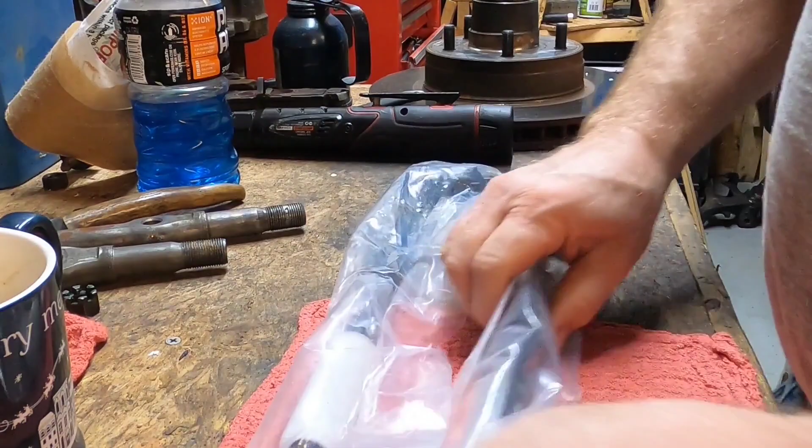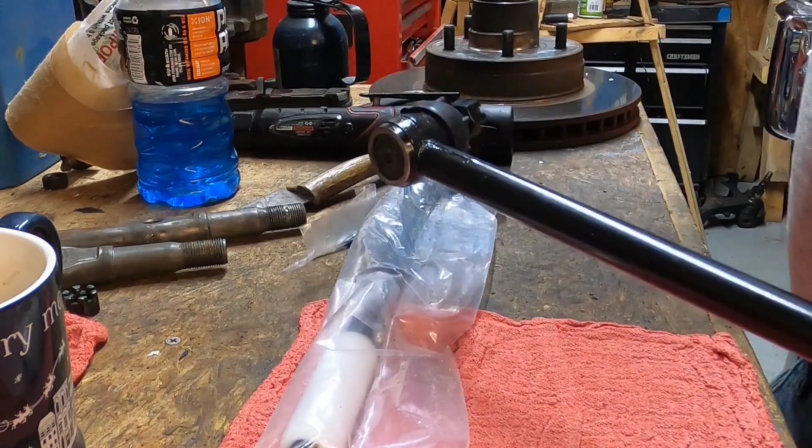So these are the inners. On the Cadillac, the inner tie rod is a lot longer than the outer. Not sure why. That's just the way they did it. Hey, look at that. I guess the inner tie rod box not providing these two little parts was a mistake. I'll have to make sure and email the sales guy and let him know.

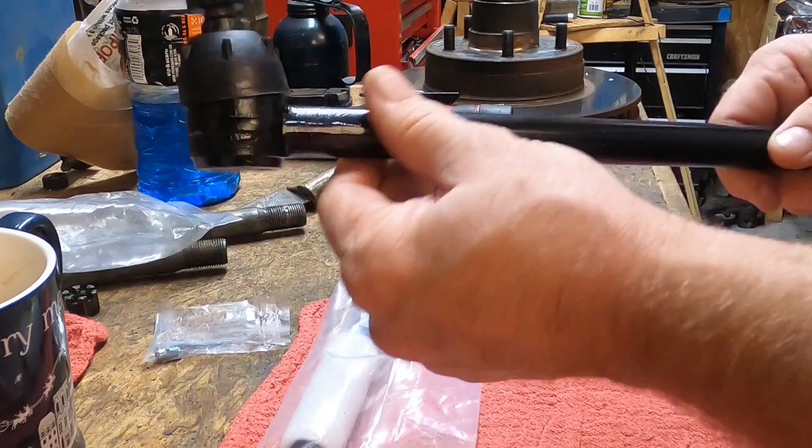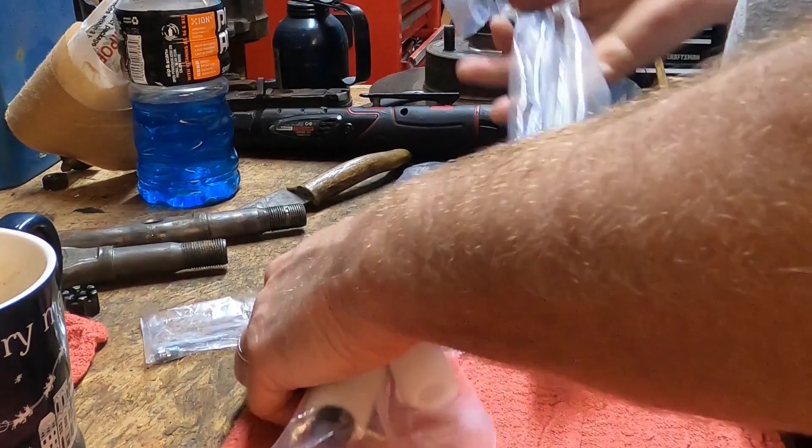I would say that the quality is excellent. This shaft right here is refined. It's extremely smooth. They put some time into that. It's a good looking product. It's fine. Now as to how long the ball joint inside it will hold up, well, we'll see what happens, I guess. All right, we'll set these aside. My parts list keeps getting bigger and bigger because I haven't installed anything, actually. I've just been tearing stuff down.

And this is probably going to be the control arm shafts. Oh, okay, no, these are the inner liners for the fender well. Apparently the control arm shafts have not shipped. I just made an assumption that that's what this was. I guess I should have known that Caddy Daddy didn't put a label on the outside of the box.

So you ever notice that everything nowadays has a California cancer warning on it? I'm like, okay, fine. If you're going to say everything makes cancer, give me strength.

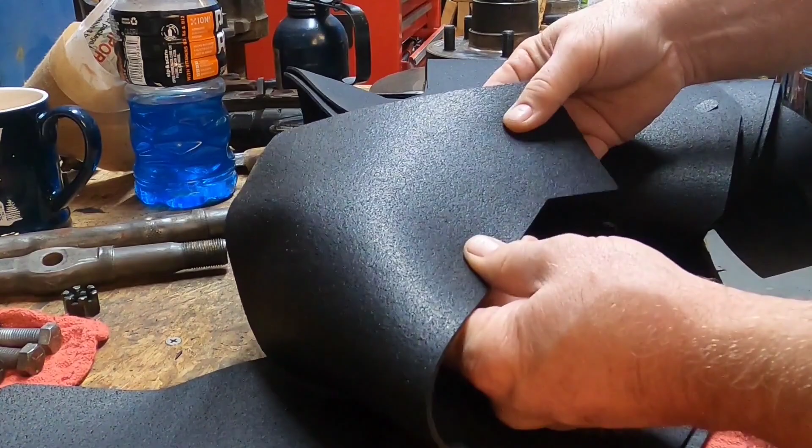These are fantastic looking, actually. Looks like it's made really well. Holy cow, man, these are nice. They're nice and pliable, and if I had to describe it, it looks like that material they put on the running track at a high school or a junior college, where the track's got that rubbery surface on it. It's probably a different material, but it reminds me of that. But okay, I'm not going to undo these right now, because this is like the last step in the project. So we're going to set these in the box and let's move on.

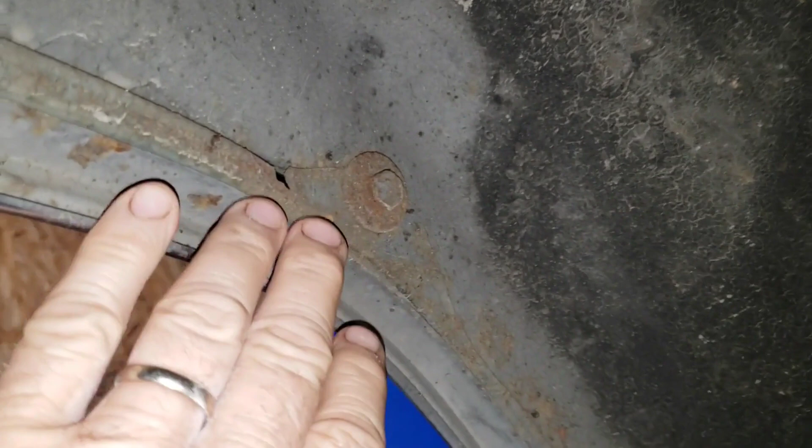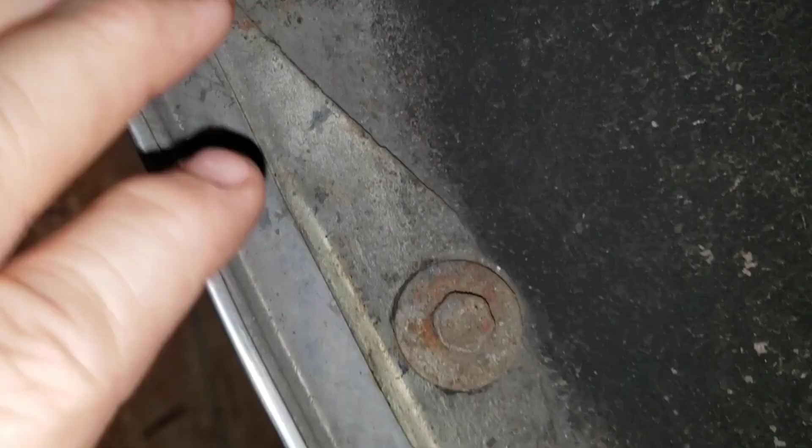All right, here we are on the passenger side, and I was getting ready to remove the upper dust shield like there was on the driver's side, and I began to notice that there isn't one. Now, I went back and looked in my records and discussion from the previous owner, and he did note that this fender had been repainted at some point in the car's life. I don't know if it's a new fender or if maybe it had some damage, or maybe it just scratched. I really don't know. If you look in here, there's no signs of any staples like there was on the driver's side. Whether or not the staples are original to the car, I have no idea. I think this fender was probably off the car, because there's no sign that a cover was ever attached over here at all. So they probably just neglected to reinstall it.

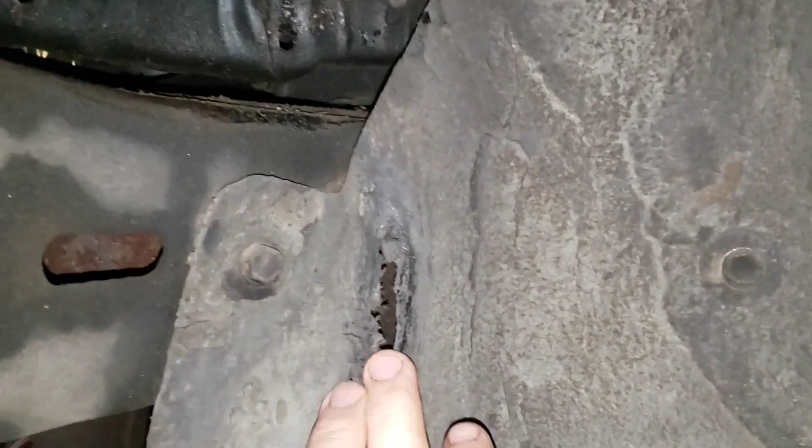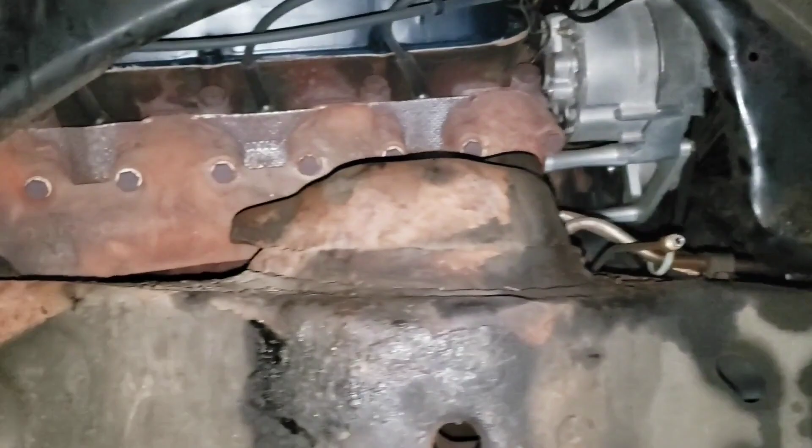So that being said, looks like we had a little bit of rubbing right here. And this cover will get replaced as well. So up next, I'm going to go ahead and take that off. And then after that's done, I'm going to start cleaning up this area like I did on the driver's side. And I don't think this side is quite so bad, really. I still got a lot of undercoating right here, so I may not touch that at all. I may just scuff it and paint it. I don't think this side is that bad at all.

So I think most of the rust is up here on the spring housing. And we've got a little bit up here, but really, it's nothing to write home about. I'll probably just scuff that up a little bit here and there, and I will treat it with the metal prep. Then we'll top coat it with the Dupli-Color gloss black. So I think the cleanup on this side will be a lot quicker than the driver's side.

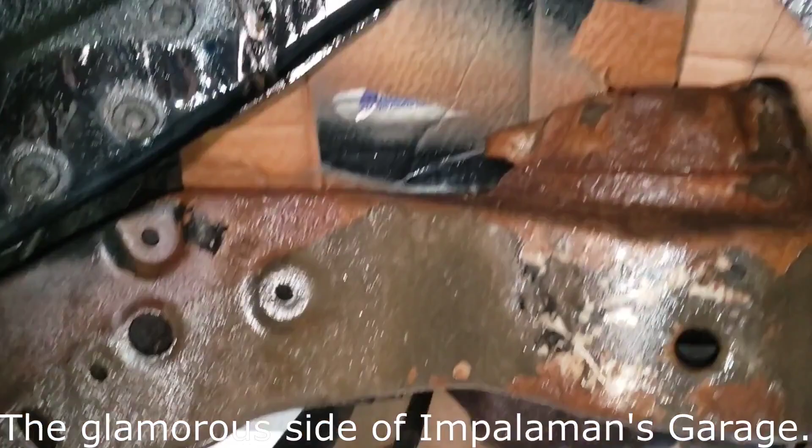All right, our upper control arms have been soaking long enough, I think. I flipped these around. Those came out really good. I'm going to let the threaded end soak for a while next. There we go. Come on out of there. Now, I actually pulled these out earlier this morning. Got them cleaned up with the pressure washer, and so that's the reason why they're so clean.

Once the rust is converted, it just comes off so easily. But these upper control arms, man, they were pretty bad. So I decided to leave them in there a little while longer. So I'm going to take these out and hit them again with a pressure washer, and then we'll prime them and paint them up.

All right, pardon all the fans. I'm drying off all the water from washing everything away. I've got the metal prep on here for about 30 minutes, and we've already washed it all off, and we got our nice gray coating. And we're going to let this dry for a good long while, make sure it's really dry, and then we'll come back in here with the self-etching primer. This side wasn't quite as bad as the driver's side, but after I got all the grease off of it, I began to notice that, yeah, it wasn't great, that's for sure.

Tell you one thing, man, that's a nice car.

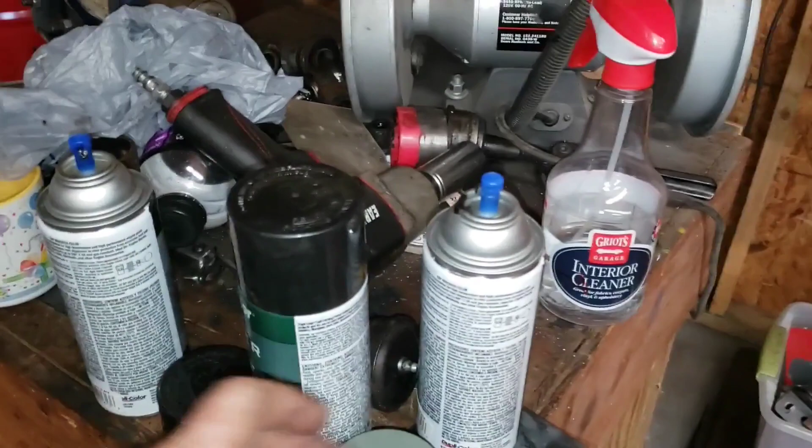I'll tell you one thing, that Dupli-Color is going to get a nasty gram from me. I'm going to tell you what, these rascals, they need to straighten up. I got one can that wouldn't spray, took it back. Another can that barely sprayed. I was able to get it out of the can, and it just made a mess of the work. This can here sprays good, sprays like it's supposed to.

This can right here, you press that button and it's like turning on a water hose. I have never seen a can of spray paint shoot out that much paint in all my born days. This one's defective as well. You got to stand 5 feet away from it to spray it. It's ridiculous. All right, I've had my say. Dupli-Color, get yourself straight. And you folks that are watching this video, you know anybody that works at this company? Tell them what I'm saying.

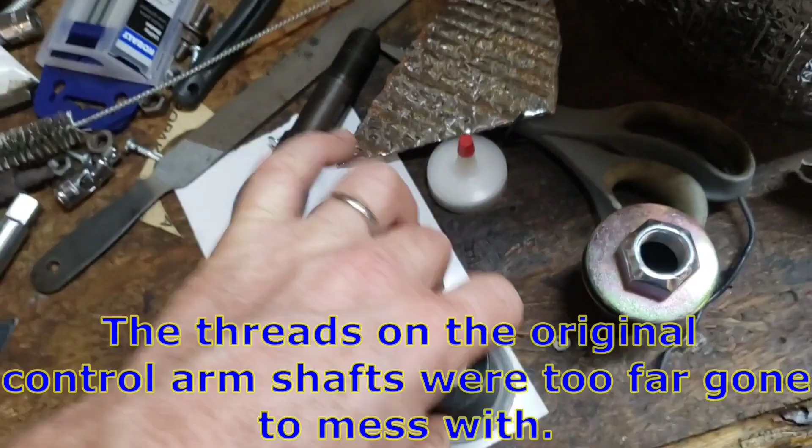All right, we've got our passenger side all cleaned up and painted. And of course, as you know, the rubber covers will be covering up these areas here with the new paint, so you won't see that stuff anyway. It'll cover this up as well. And on this side, we have our battery ground, which is connected right there. Not too shabby. I think after we get this oil pan cleaned up and get that all addressed, the bottom of this car will really pop. Not that anybody's going to be staring at it but me, but hey, at least I'll know it's good.

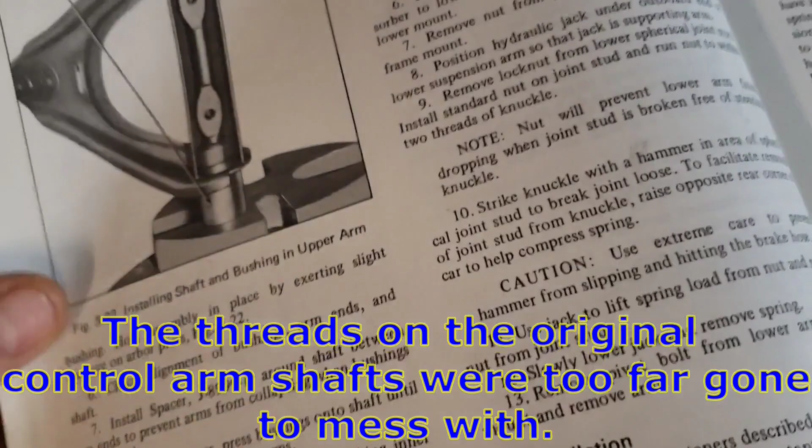All right, folks, let's begin reassembling the front end on our Coupe Deville. We're going to start with the upper control arms. From Caddy Daddy, I purchased new control arm shafts, and they came with the bushings, the lock nut, and the washers, and then we have 2 of each clearly. So according to the book, we are going to install an installer tool here on this end, one on this end, basically just a pipe that fits the bushing perfectly.

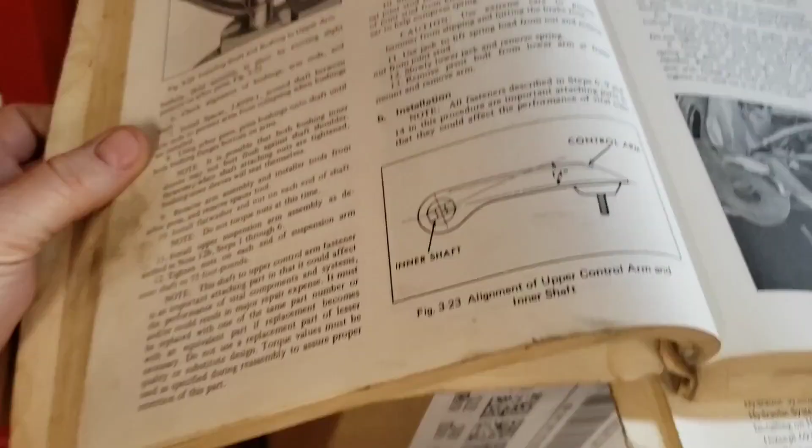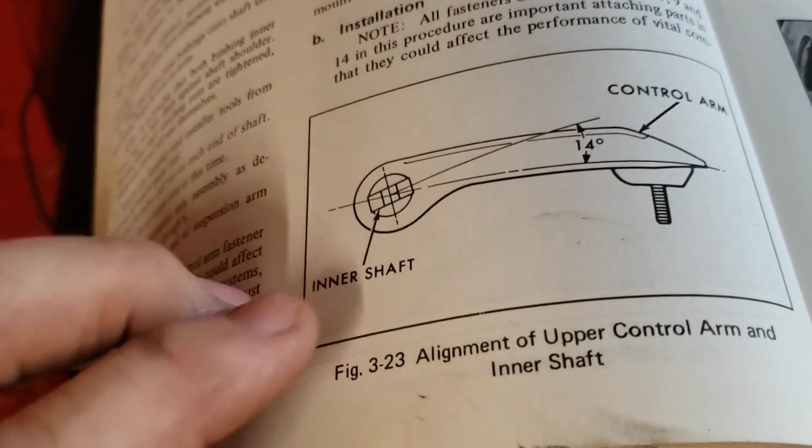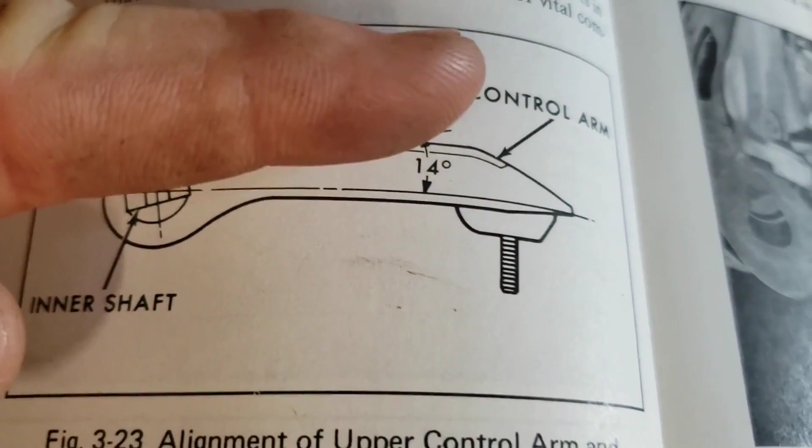And then we're going to use a spacer between either end of the control arm to keep the control arm from compressing this way. They have like a half pipe here, but I'm just going to use a piece of angle iron that I cut to length already. It's at 11.5 inches. And I have 2 pieces of pipe here and here. And the pipe needs to fit around the rubber part but sit there on the lip of the bushing, in that manner. So, all right, I think you catch the drift there. Let me get all of this stuff together over at the press, and we'll go ahead and get these bushings installed in the upper control arms.

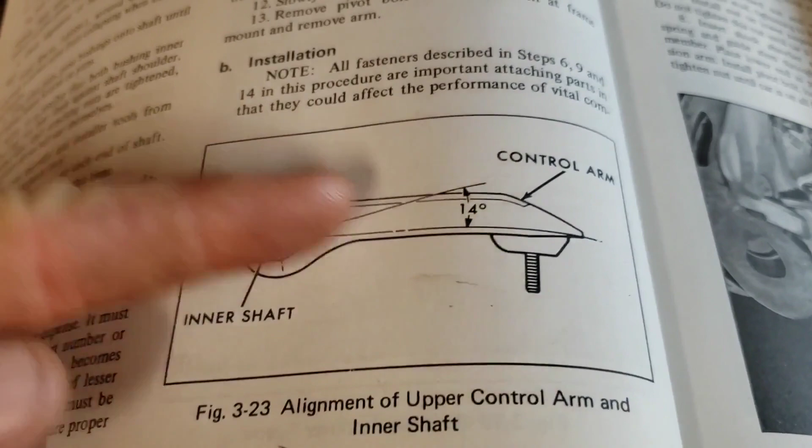All right, we're getting ready to put this upper control arm back together here. You don't want to just arbitrarily put the control arm shaft back in there, because once you do, it'll be tight, right? So there is an angle that the service manual wants you to use, and it is 14 degrees.

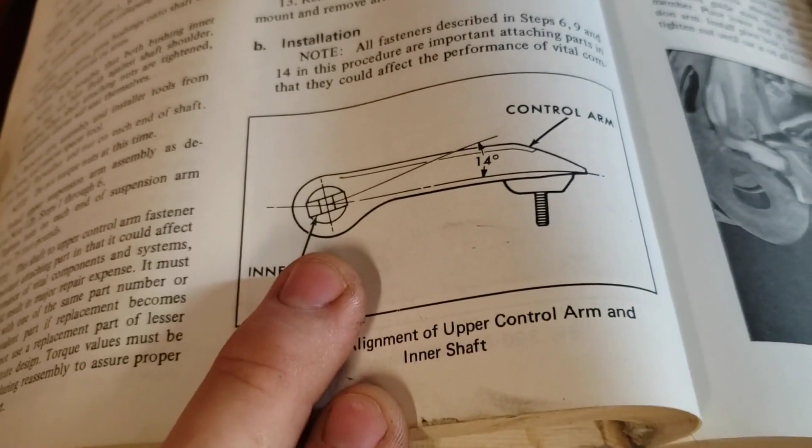In other words, the straight lines here denote the flat part of the control arm shaft. So what you're going to do is angle this at 14 degrees from the center line here of the control arm, and that looks sort of like that, right? So the lower part of the control arm here lines up with, I guess you'd call it the x-axis there, right? And that will intersect in the center of that hole, and we'll simply twist this and get it exactly 14 degrees. Yeah, that'll happen.

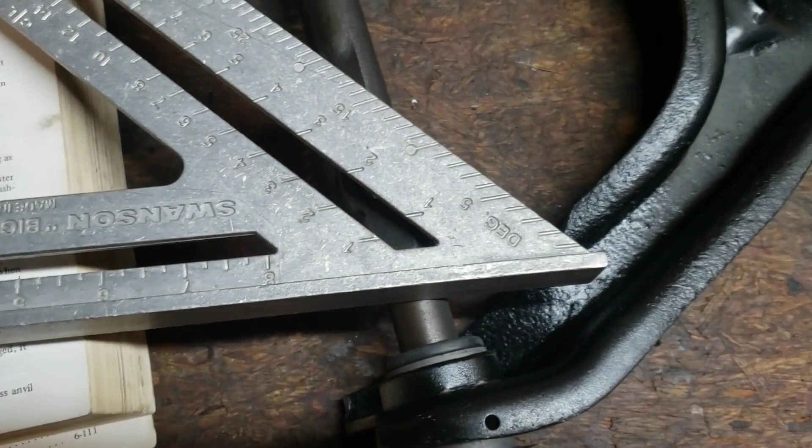So I was trying to find my little angle thing that I use for crown molding, but I can't locate it. So I'm going to do a little trigonometry here with my speed square and come up with the appropriate angle. All right, so one thing I noticed here about the control arm shaft, it looks like they've got a line right there on the end of the control arm shaft, so that you can get your angle just right before you press the bushings in place.

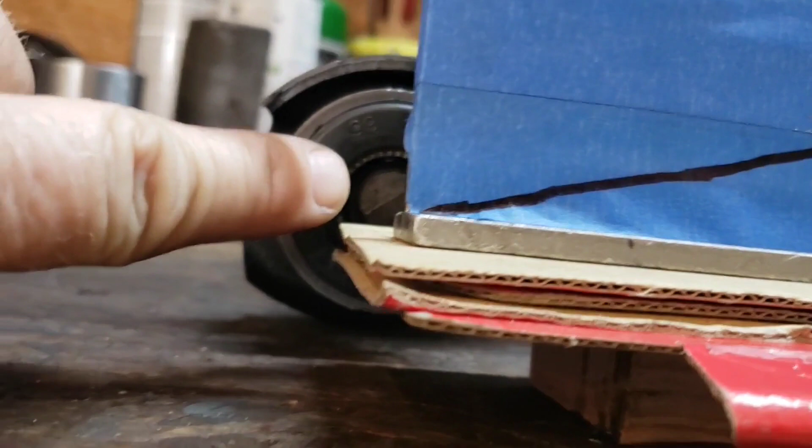So what I'm going to do is use my speed square. How do you use this thing again? Goodness gracious. There we go. Degrees. So there's your 5-degree mark right there. 0 point is back here, and then a line from there to there is 5 degrees, and then we're going to go to 14, which is right there. So let's make a mark. All right, that's our target right there. It's our 14-degree mark.

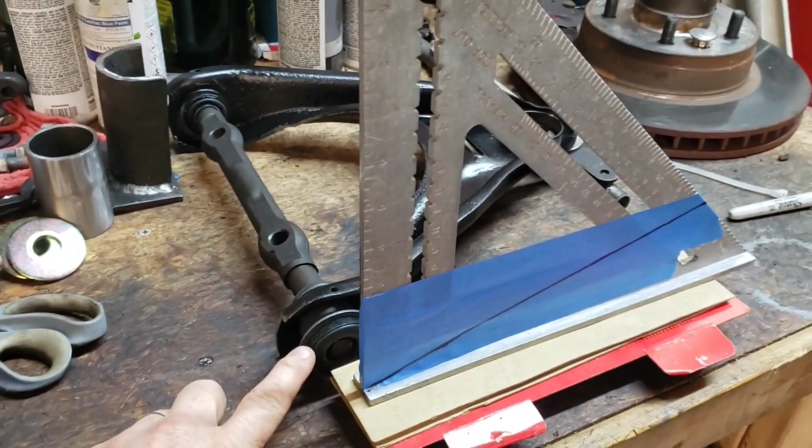All right, call me crazy, but hey, whatever works. So I got a little piece of wood and some cardboard there. Wanted to get the 0 coordinate mark here on the speed square as close to the center of the control shaft as I possibly could, and I believe I've done that. Went ahead and made myself a line right there, so I can take the line of the control shaft and line it up with the black line here on the speed square. So I'm going to piddle with this for a minute or two and see if we can't eyeball that and get it about where we think it ought to be.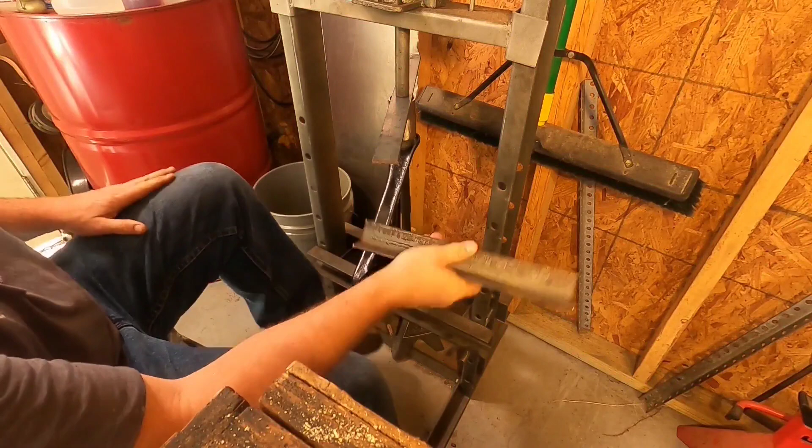And then I'll punch me a little mark down here on the control arm shaft that lines up with the line on the end of this thing. That way we know we have the correct orientation. And then here on the bench, I think I'll try to tap this thing into place and see if we can't tighten it up just a little bit, and then take it over to the press and finish the job.

And the reason this angle is important, it's really about the longevity of the bushings, right? Because the bushings are going to be tight, and the rubber is going to be twisting back and forth like that. So if this angle here is not quite right when you mount this thing on the car, you're going to be twisting these bushings too far, and they'll rip. They'll just rip apart. So this needs to be correct, or in the reasonable ballpark.

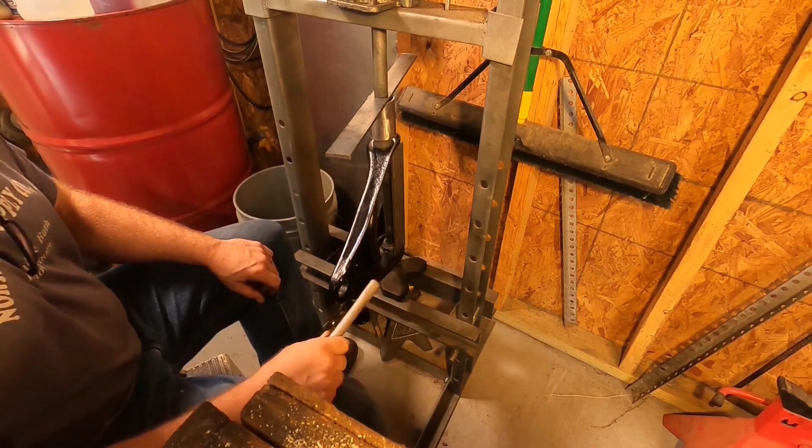All right, so I've got a piece of angle iron here. We're going to use this as our reinforcement. I just want to make sure this thing is straight up and down, really. And I think what we're dealing with is the lack of squareness of the pipes that I cut for this job. Like my press is square, right? So I don't think it's going to matter a whole lot, folks, because this is just not that much force. Getting them out of there is one thing, but putting them in, it won't be that bad, really.

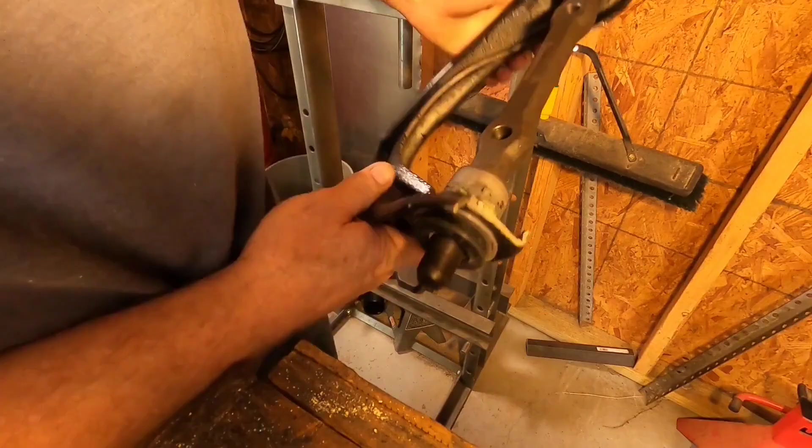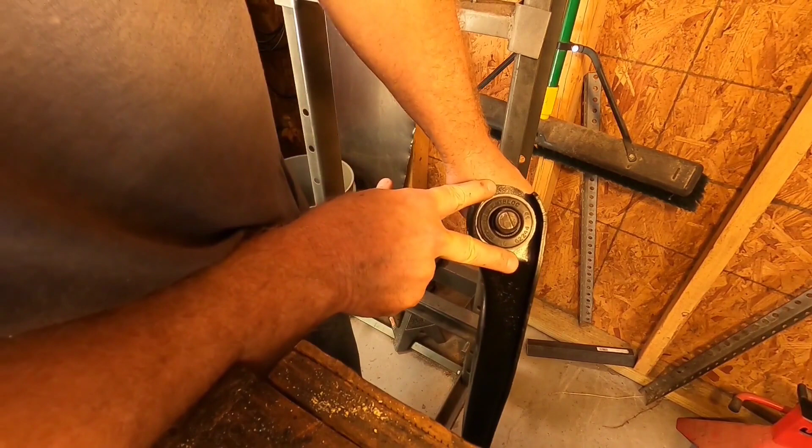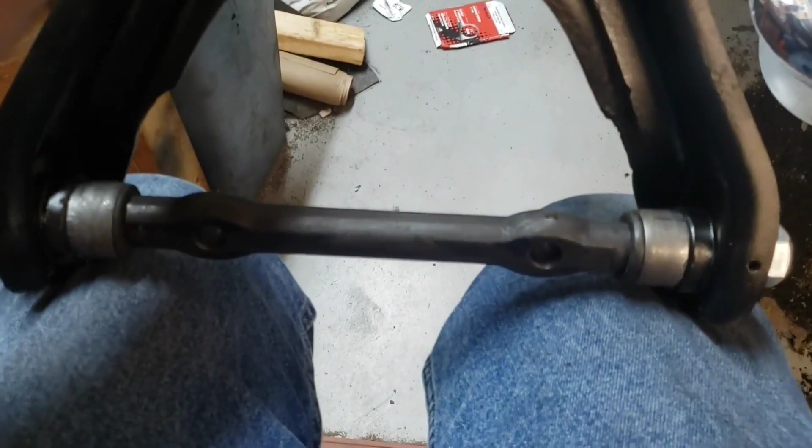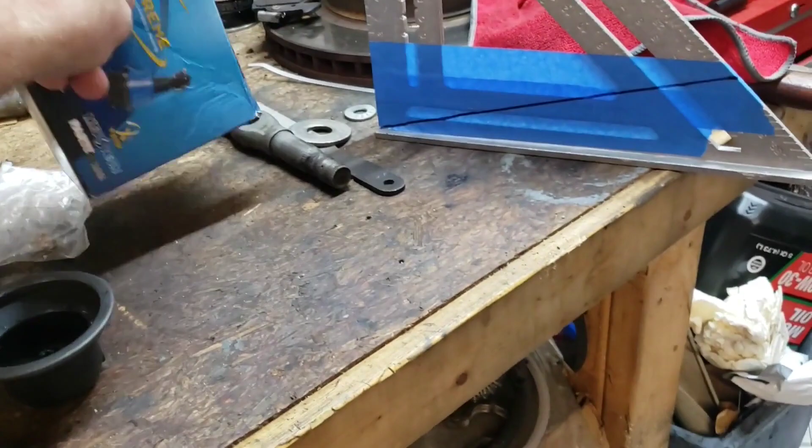Yeah, it's going in really easy. Well, not easy, but you get the point. I guess that we're probably done. Yeah, I think we're done. That was awesome. All right, we got our bushings pressed in there all the way on both sides, all the way around. Looks good. And let's double check our angle here. So I have this little line here between the two little marks that I made.

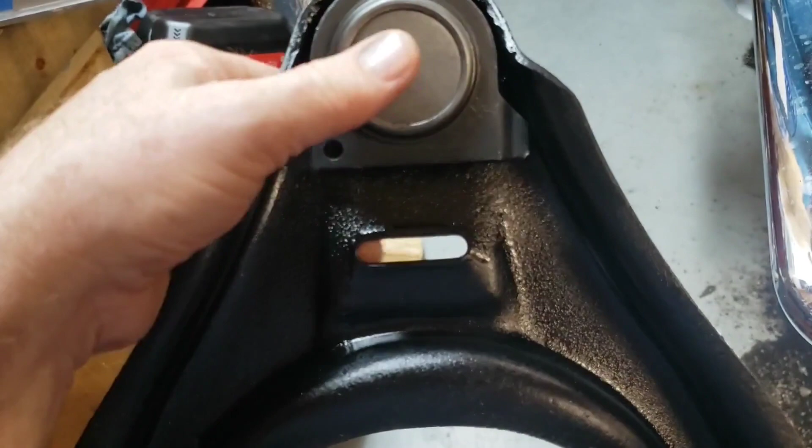And it is lined up between the two little marks. So, all right, let's move on. I'll go ahead and install the control arm shaft on the other upper control arm off camera. All right, we got the control shafts in both upper control arms.

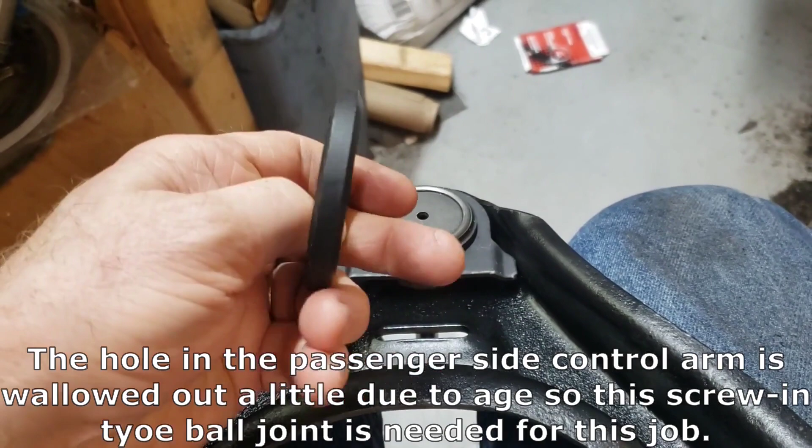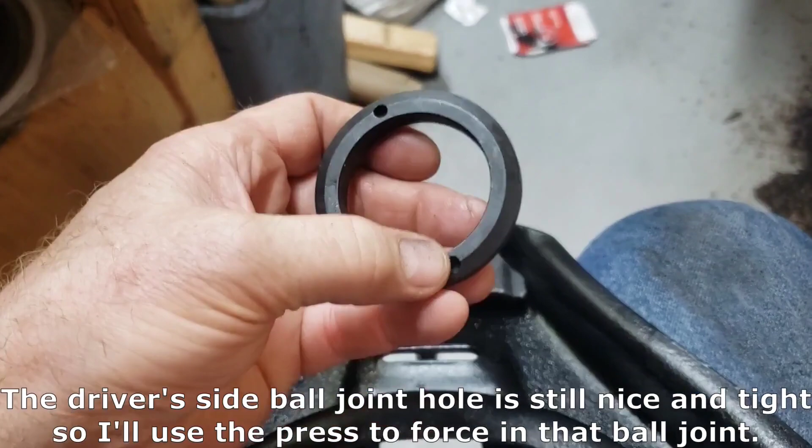Getting ready to put the ball joints in. Pretty simple, really. This Moog upper ball joint MS50547 is for the front right or passenger side. And this is the passenger side upper control arm. That doesn't matter. It only matters because I put a P there and I wanted the same one to go back on the same side of the car.

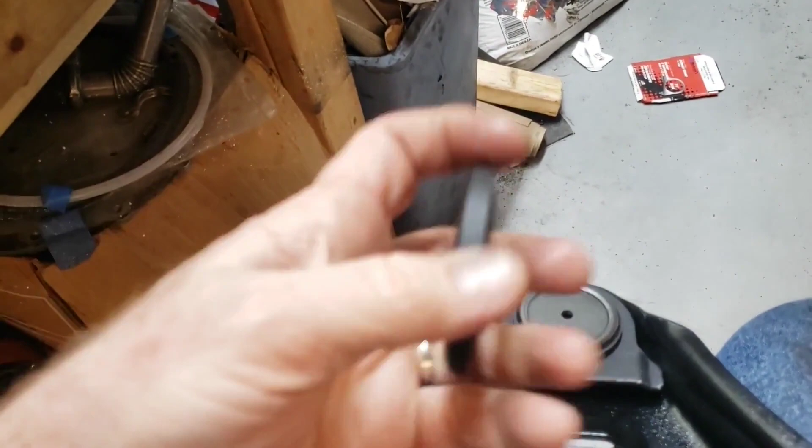Anyway, so these two flanges here, they clearly fit into this recess here. If you flipped it around the other way, it simply wouldn't work. And since this is the one that goes on the passenger side, the open part of the ball joint goes toward the back of the car, and the closed off part goes toward the front of the car. If you look at the other ball joint, it's exactly the opposite.

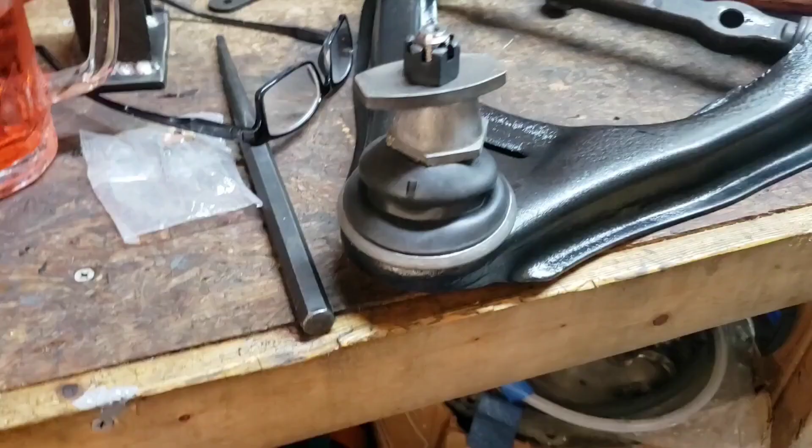And the way these repair ball joints work is they're threaded, and you got this threaded ring, and you got some holes right here. There's probably a special tool that goes into tightening this up. I'm not sure if I have it or not. If I don't, I'm just going to use a hammer and a punch to tighten up this ball joint. And then of course the dust boot will go over the top of that.

It has a metal ring right here that seals around this ring, and of course lastly you have the nut, and the box also comes with a cotter pin and an Alemite fitting to grease the ball joint.

All right, we got the upper ball joint in there, tapped it in place a little bit, used a punch and a hammer to tighten up the ring until the travel was bottomed out, and we slipped the dust cover over it, and that's got a metal ring, and it's got a fairly tight fit. So you slip it down on there, and just a real easy tap around the edge will fully seat that down around there. And of course your eccentric goes on next.

This is how you adjust your alignment, and the hex head here goes towards the rubber, and then you have this little oblong looking washer type deal followed up with the castle nut. I also need to install the grease fitting there. I'm going to go ahead and reassemble the other control arm off camera, and then we'll get these upper control arms on the car.

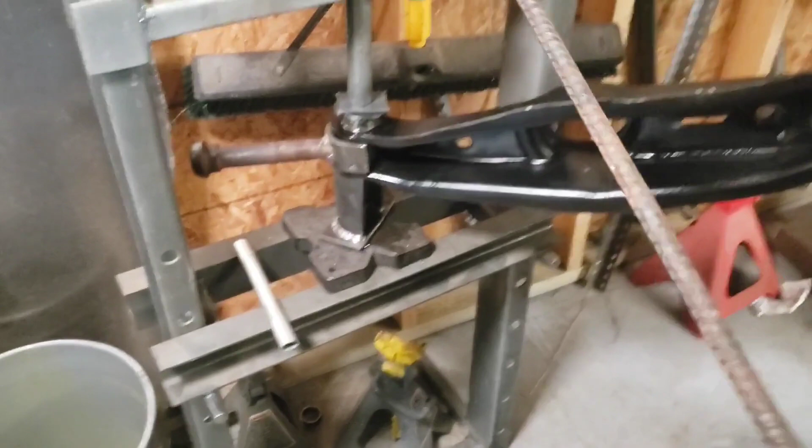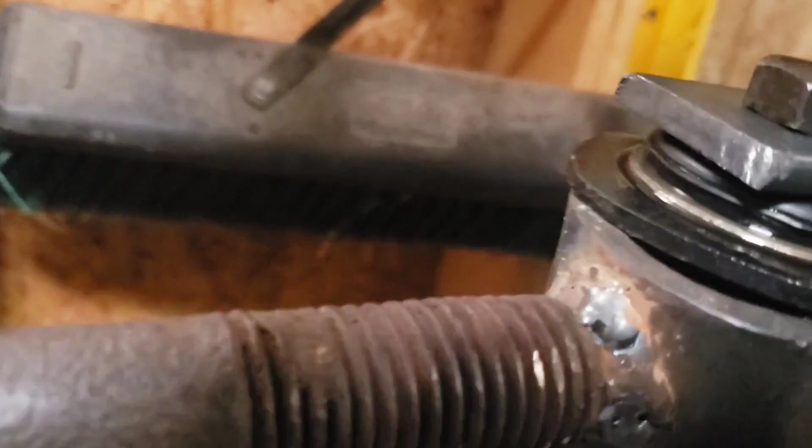We have the tool that we made at the beginning of this video series placed underneath here to serve as our receiver cup. We have our other custom-made tool placed between the control arm flanges to keep it from compressing as we press the new bushing into place. And I'm using one of the bolts that came out of the suspension. It's really large, a little over ½ an inch. It slips down into the bushing hole there, and I've got it placed into a piece of 1/4 inch steel here, and I drilled a hole through that.

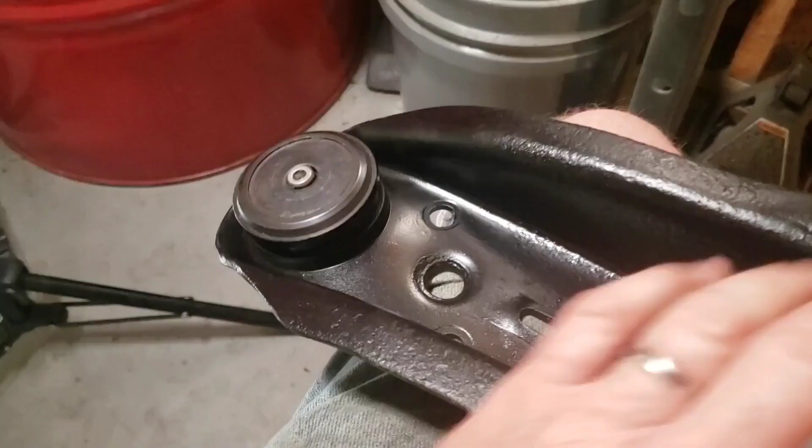So I'm simply going to press on the bolt, and that's going to press on that, and it's going to be just right. So cross your fingers. Let's see how this goes. And the rubber is compressing, which I expected it to do. All right, with some silicone around that thing and using a longer bar, it seems to be going in.

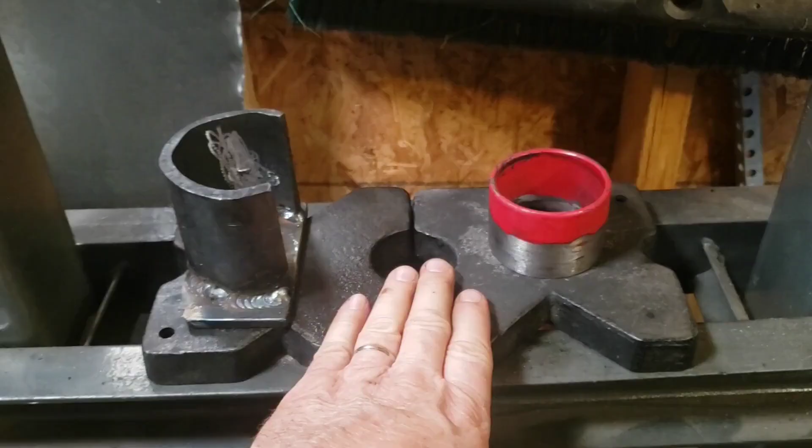All right, I think we're finally successful there. The wetness is the silicone lubricant that I used, so I think that was a must for this job. This lower control arm bushing is a really, really tight fit.

All right, up next we're going to press in the lower control arm ball joint, and got it started by hand right there just to check the fitment. And of course we have our bushing already installed. So I modified one of the tools that I made in a previous video. I just basically bored about a 1 inch hole there in the end of that thing, so that we got our plates here, and set the hole over the hole in the plates.

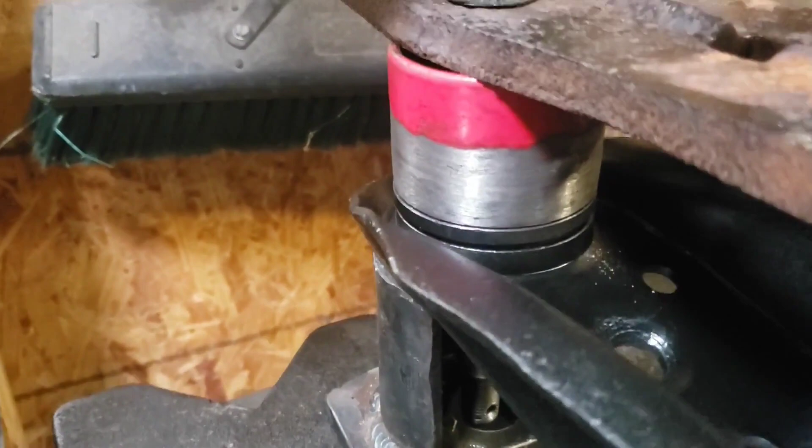And we'll take the control arm with the ball joint there, and we'll set it right down in there, and the hole will give room for the ball joint shaft to go through like that, so we can fully depress the ball joint into the control arm.

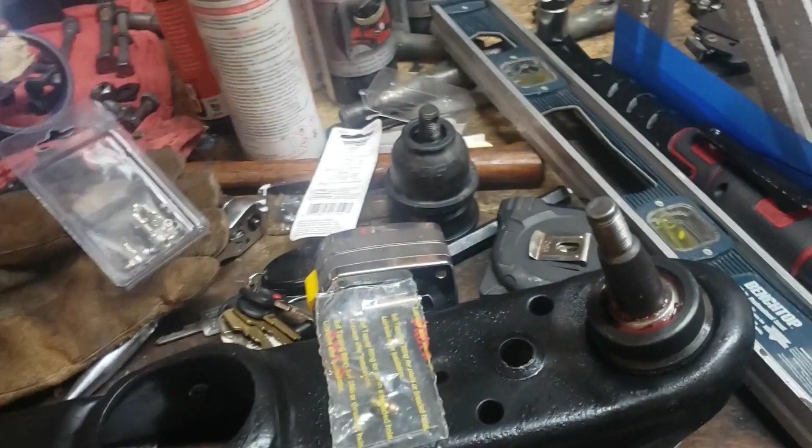And then we're going to use this, I robbed this from a cheap ball joint tool I've had for years, which I never used, and it will fit across the ball joint just perfectly like that, so that will work out well. And I'll take another flat piece of steel, 1/4 inch or something, and place it on top of there, and we'll get all of that into the press, and we'll install our ball joint.

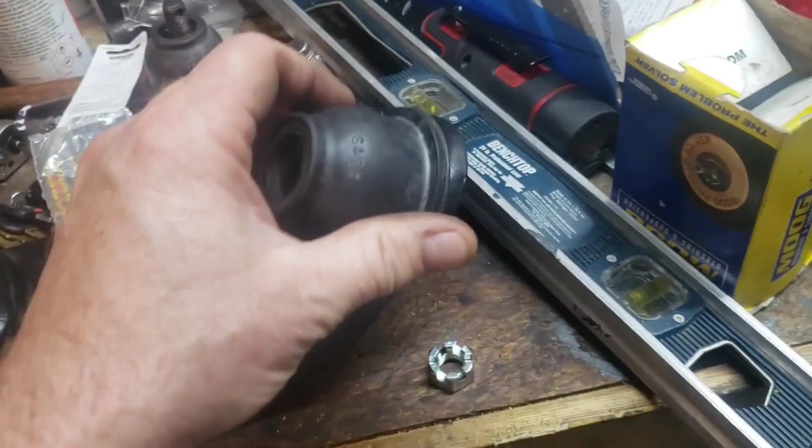Alright, that's what that looks like. Got an old piece of steel from an old junk railroad, an old piece of pipe, custom tool with a hole cut in it. Got our arbor plates there, with the indention open for the ball joint shaft to protrude through.

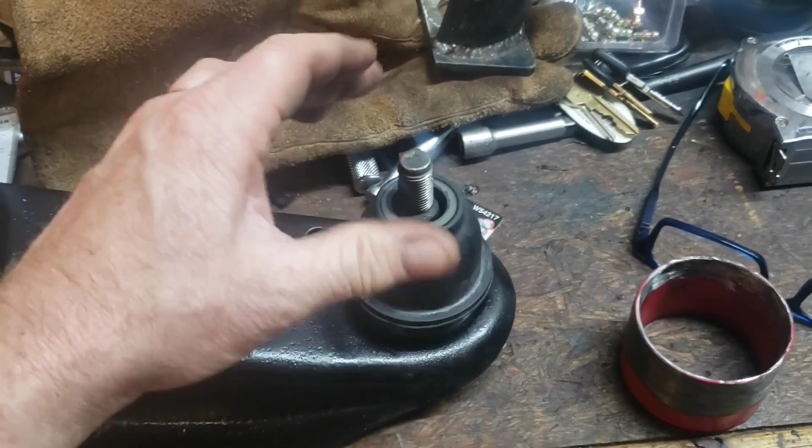And this should... Alright, we're all the way down. Let me take all this mess out of here. Alright, this is that TRW branded lower ball joint that I got off of eBay. And good part, made in USA. New old stock, but it didn't come with a castle nut. It got lost or something. Went to the parts house and bought a new castle nut. It did come with the grease fitting and the cotter pin, however, and of course the boot.

Alright, we're going to put the dust boot on next. There is a gap right here, and there's some verbiage on here that says put this towards the inboard of the car. I'm assuming this is the gap for the grease to ooze out whenever you grease your ball joints, and that will make the grease ooze out this way and not towards the brakes. So I've got that positioned on there.

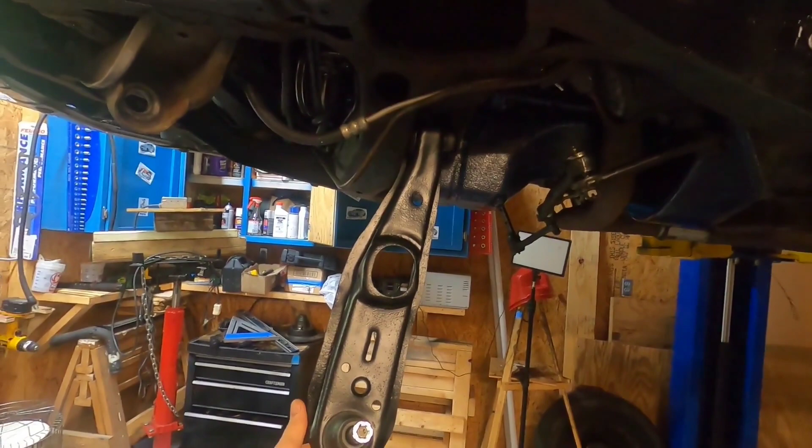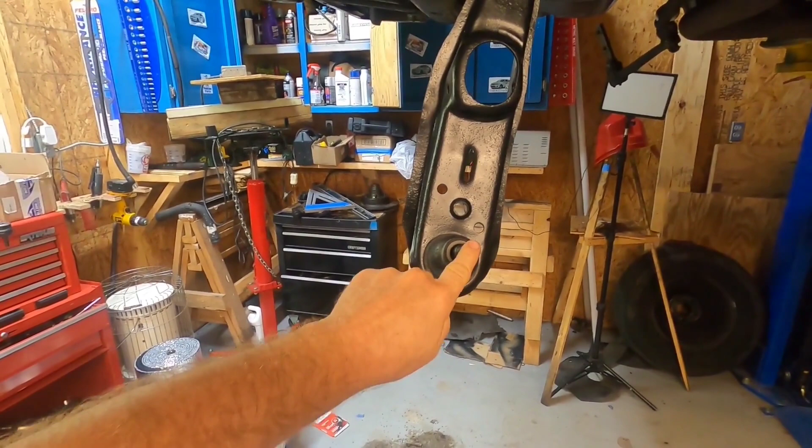This lip has basically got a steel ring in it, and it needs to be tapped on or forced on around the ball joint. So we're going to use this old piece here again, and it fits over that actually perfectly, coincidentally. And then we have this tool we made. We punched a hole in it, and that will go over that around the ball joint shaft, and I'll take a big hammer and tap that down and seat the boot around the ball joint.

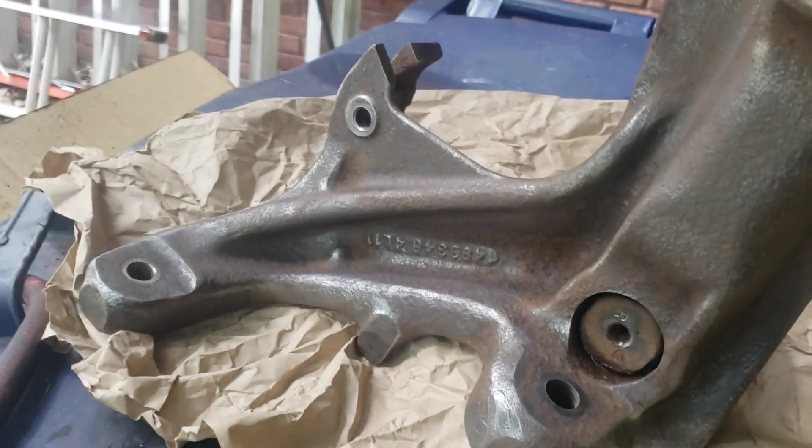Alright, let me tell you something. If you think you're going to seat this boot around that ball joint by hand, not going to happen. I had to use quite a bit of force with this setup, so that's just a handy tip for you if you're installing this kind of ball joint and putting the boot over that. So you know what, there probably is a better way to do it than what I'm doing, but I just made it up on the fly.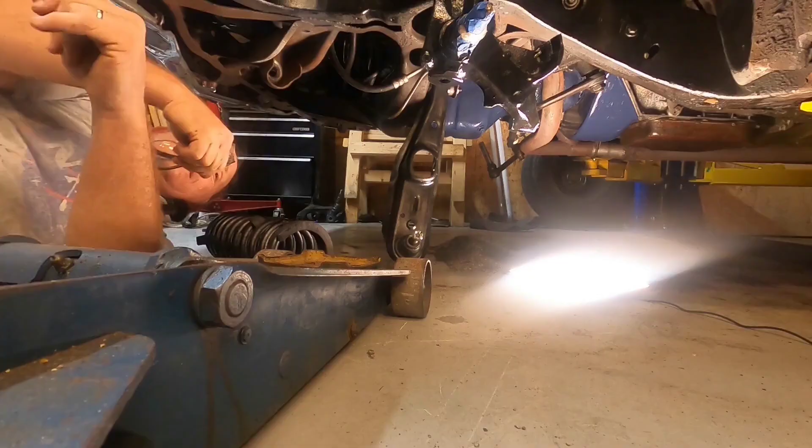Same goes for the lower control arm. Once we get the spring in and the spindle in, we get the tire back on, and we get the car on the ground, we'll tighten up this nut at that time. But for right now, it just needs to be loose, because after you tighten all that stuff up, you're going to compress the rubber. The rubber's travel needs to be this much. If you tighten it up here, you'll basically just break the rubber if you try to bring that up.

As we prepare to put the spindle back on the car, we're going to use some standard nuts when we put this ball joint into the steering knuckle. And I've got a standard nut for that, a 9/16 by 18 thread, and a 1/2 by 20 standard nut for this one. So you'll use the standard nut to tighten the ball joints into the steering knuckle, and then you'll remove it, and then you'll install the castle nut afterwards. So up next, I'm going to finish painting the steering knuckle.

All right, welcome back to the mobile paint booth. Disregard the air conditioner noise. It is the summertime after all. So we just got through with a wire wheel. Well, first we degreased them with some Super Clean, then we pressure washed them, and then we wire wheeled them. And now I'm going to do some self-etching primer. I'm going to follow that up with some engine enamel gloss black, and they'll look brand new when we're all done.

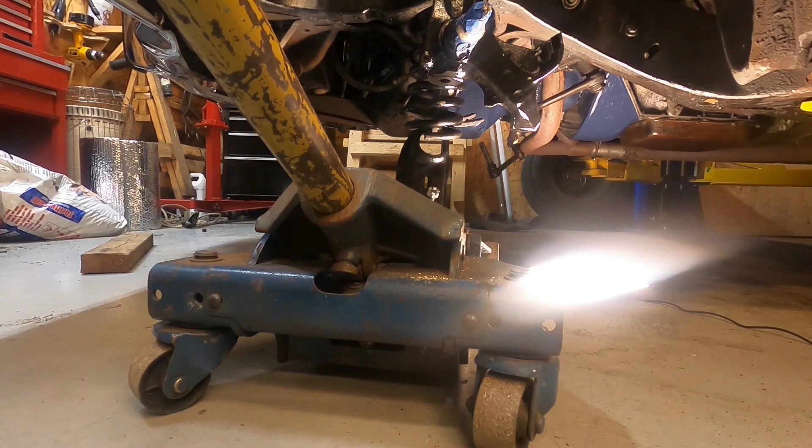All right, let's go ahead and get our steering knuckle in place. We've got the eccentric placed in there in somewhat the original location. Oh, let's see, how do I do this? That's got to be upside down. Trying to get it back in there the way it was. So there we go. All right.

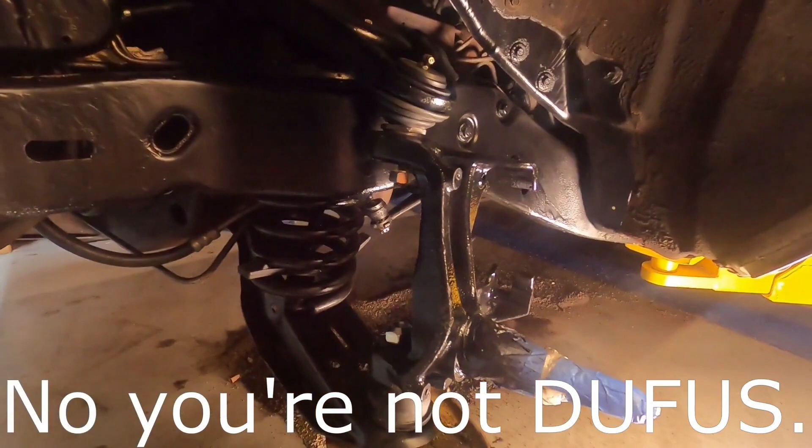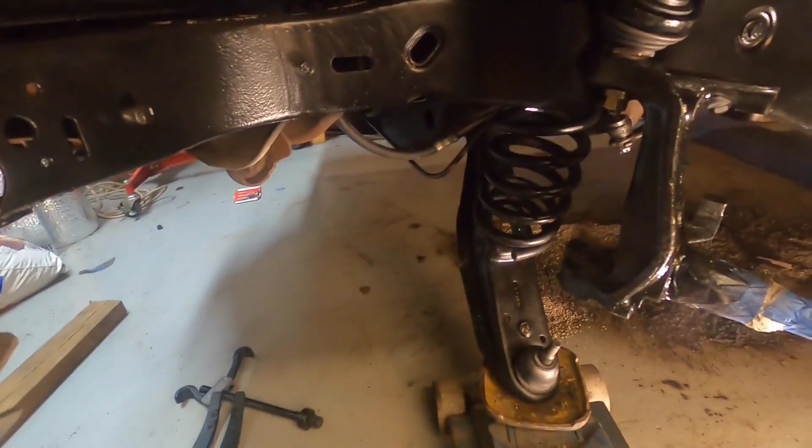There we go. All right. The eccentric goes on the top, and then we've got that oblong washer beneath that, and we've got a standard nut and a standard washer. And we'll tighten this up. All right, so the idea here is to tighten up this standard nut against the flat washer there, basically until the eccentric seats into the steering knuckle assembly. Once that's done, you're going to remove this, install the castle nut, and tighten it down to 60 foot-pounds.

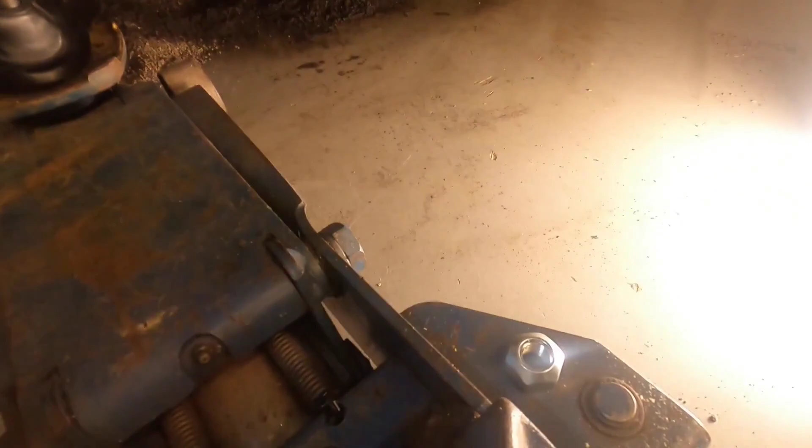So I'm not sure what seat means according to the book, but pretty doggone tight, so when you take that nut back off, it won't fall off. Actually, I don't have to take that off just yet. I can leave that like that, and then go ahead and bring the lower control arm up and tighten it up, and once that's done, then we can take this regular nut off and put the castle nut on. We'll do it like that. Starting to come together, isn't it?

All right, I got a spring compressor on this thing right next to my head where it's nice and safe, so that's always good.

Pow! He was an excellent DIY home mechanic until one day the spring compressor shot through his skull. Okay, I've got a jack, just like that chick in the AC/DC song, but it's different.

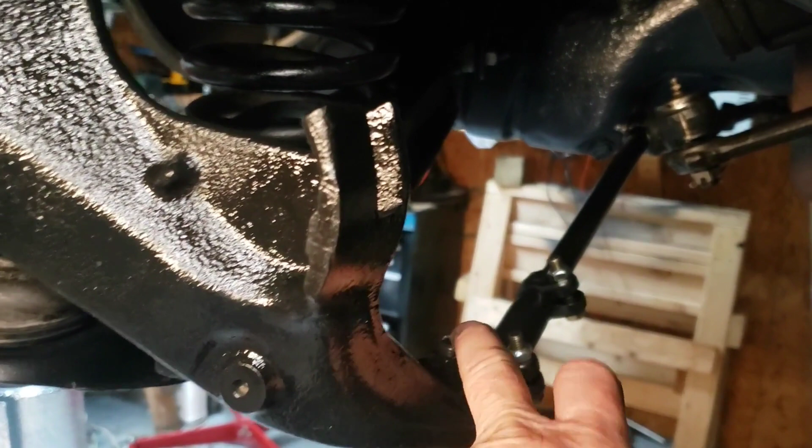So basically, I've got to get the spring nestled in its housing up there. So the distance between that and this ridge on this lower control arm is shorter than the uncompressed length of the spring, which is brilliant. So that means, unless you're Arnold Schwarzenegger or somebody, I'm not gonna manhandle that in there. So I've got to have a spring compressor in here, and it's got to be compressed about three-quarters of an inch or an inch or something like that. So I've got it under tension, not a huge amount. It's not crazy, but enough to get it into position.

So let's get this jack over here, and I've already positioned this thing in here once, so I know it'll slip in there. Question is, will it slip in there on camera? I don't know. Let's see here. There we go. That's what I wanted right there. Now don't you even think about doing what I'm thinking you're wanting to do. Now, what we're going to do is come back here with the old leg. See that? Got my leg back there. All right, now I'm going to get out from underneath this death trap. That was a little hairy, but I think we got her done.

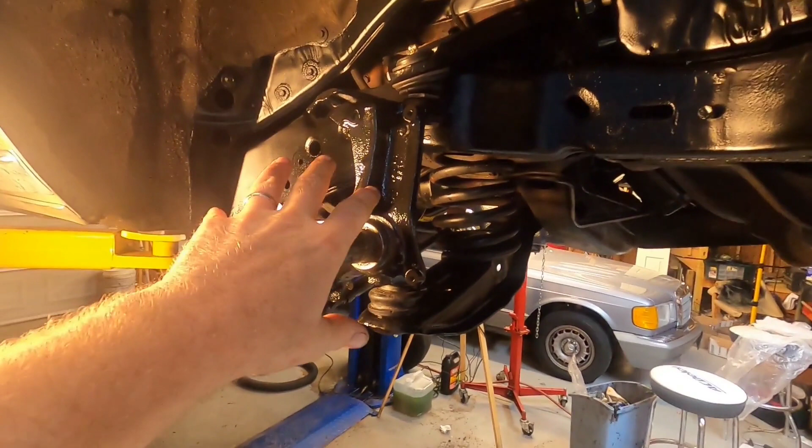Now I've got to lift the jack up, and at some point during this process, I can get underneath there and remove that spring compressor. Let's just jack it in the air and see what happens. I'll be quiet now. That's right, settle on in there, buddy. All right, service manual says to put a standard nut on there. And what I'm going to do is torque this nut down, and then I'm going to loosen the spring compressor, and then we'll carry on.

All right, I made a mistake. That spring compressor, and I should have remembered this, but I didn't, is too large to fit into that spring when it is in a compressed state. So when I tried to remove it after I had already tightened this, I couldn't get it out. So I had to take the regular nut back off, lower it down, and then take the spring compressor out. And now I'm going to jack it back up and reattach the lower ball joint to the steering knuckle. Not a huge deal, but it is a procedural thing that you will need to know.

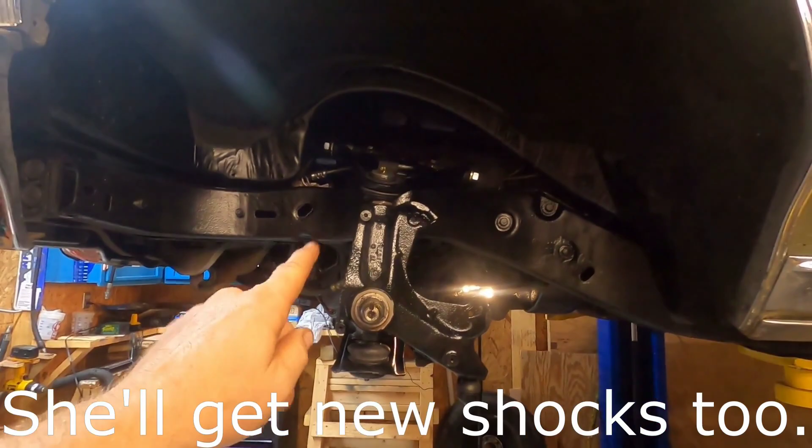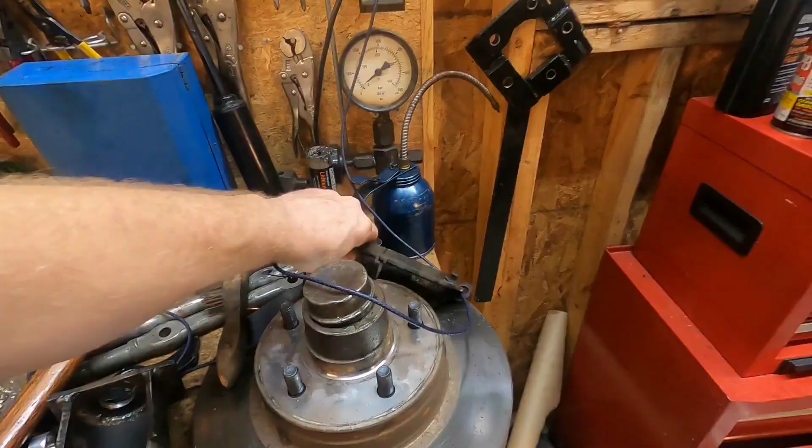All right, so where does that leave us? What do we got going on here? I can't tighten this down to the proper torque setting because this thing still moves a little bit, so that'll just be really annoying. So what I think I'll do is I'll get the tie rods back in place. After that is done, I will remove these standard nuts and I will torque the castle nuts to the proper setting. I got the rubber bump stop there. Still need to reinstall the rubber bump stop here. I need to put in the strut rods that go from here back to here. We got a lot of stuff to do yet, so let's just press on, shall we?

So this is what it feels like with a detached tie rod on the front of your automobile.

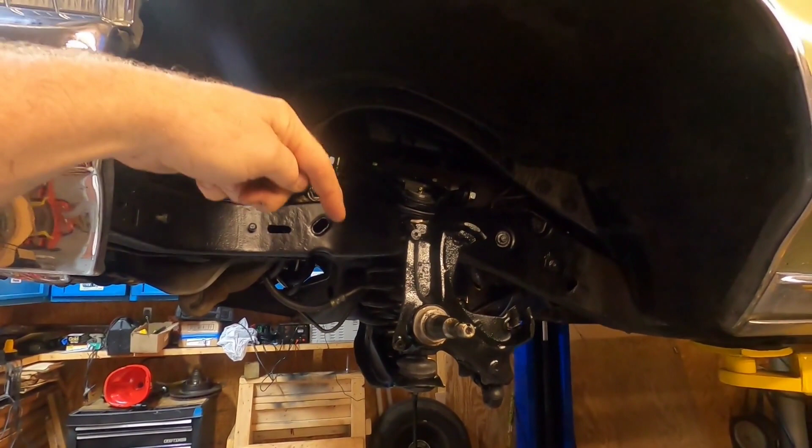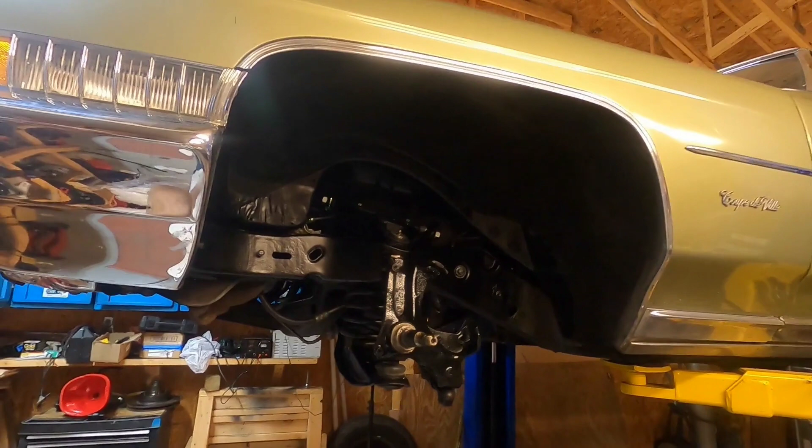And I think it's getting worse. All right, we've got the standard castle nuts on both the lower and the upper control arms finally. And I've got all these ball joints greased up as well, upper and lower, and on the tie rod. And I've got the tie rod installed, clearly, the new one. The longer part goes towards the inside of the car, by the way. I've got these torqued down as well, cotter pins installed, and so on and so forth. And they are greased up, as you can tell.

So coming together. So I think at this point, I'm going to go ahead and clean up the other steering knuckle for the passenger side and get that painted up and installed off camera, and just sort of do both sides simultaneously. And then after I'm done with that, I'll pick back up here with the driver's side. We'll go ahead and get the strut rod installed with its bushing kits as well. Get the shock installed. We need to rebuild the brake calipers. I manufactured a new brake line. Get that installed. Anyway, we've got a lot of stuff to do, so we're going to carry on. So we'll be right back.

Well, it appears we've reached a stopping point for this weekend's video activity. We have successfully reinstalled the upper and lower control arms on both sides of our Coupe deVille, along with the inner and outer tie rods. These were replaced. They were obtained from Caddy Daddy. Got these torqued down: 60 foot-pounds on the inside, 37 on the outside. Not sure how they determined that, but oh well. These adjusters are 20. I don't know why I bothered tightening them down. The alignment's probably wildly out of whack, so they'll just have to loosen all that stuff anyway at the alignment shop whenever I drive it down there.